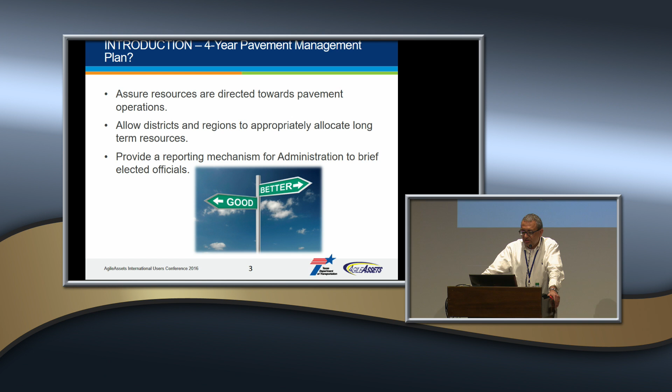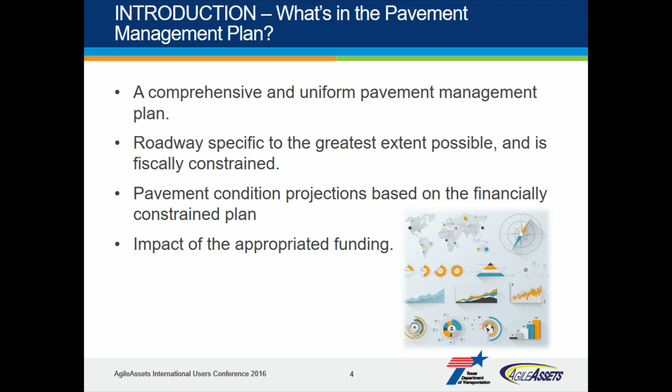And also this plan is beneficial. It gives us a good mechanism to report to our commissioners and our legislators: here is what we're doing for the next 4 years, and here are the results that we expect. The plan that's used by TxDOT for this legislative requirement is a comprehensive plan. It includes construction projects and maintenance projects, basically any project that will impact pavement performance or our scores on pavements.

The plan is roadway specific and is fiscally constrained. Most of the districts' plans are roadway specific for years 1 and 2. For years 3 and 4, the majority of them will assign a budget for a county or a maintenance section. They will say X amount of dollars for preventive maintenance or X amount of dollars for light rehab. And also, the plan gives us a way to show the impact of the available funds and the projects that we're selecting. This is what we expect.

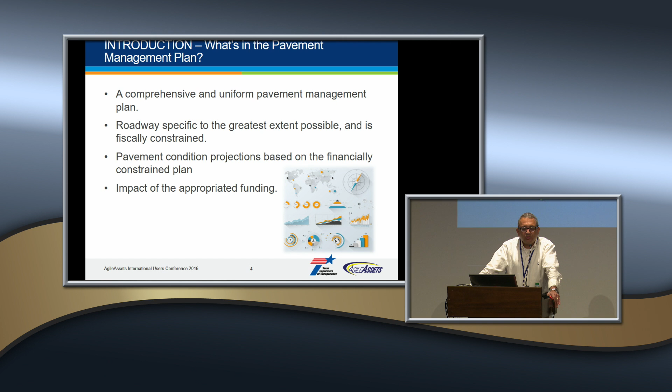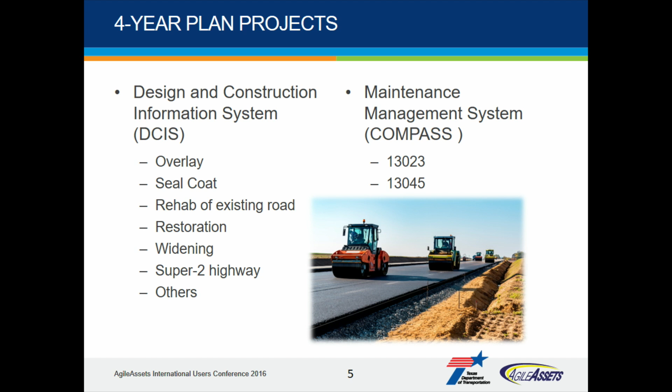So when we work on these 4-year plans, we extract information from 2 different sources. We extract information from our design and construction information system, we call it DCIS, and we look for overlay projects, seal coat, rehab, restoration, widening, Super 2 highways, and others. When we started working on these plans, we were only pulling construction projects. But we realized that we were missing a lot of projects, because some safety projects can impact pavement performance, and with some mobility projects you're getting a brand new pavement.

So we stopped pulling projects by category or group of funding. We are pulling projects by work type, and we don't account the funds from mobility or safety, because this would bias the numbers. It would show as if we're spending huge amounts of money on maintenance and rehabilitation, but we're trying to capture the benefits that we're getting from the safety and mobility projects. And we're also trying to capture the maintenance projects and the in-house work.

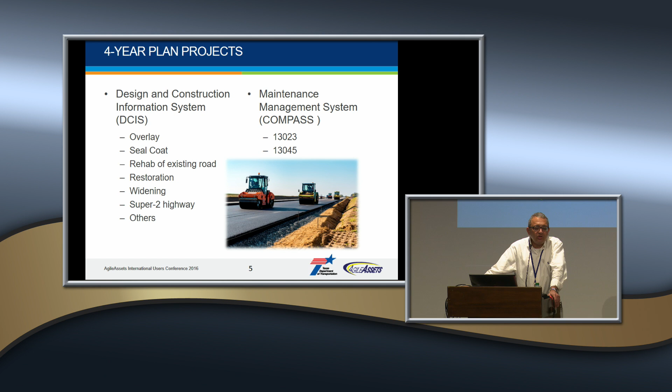We have our maintenance sections. They do a lot of in-house work, a lot of in-house chip seals, or as we call them here in Texas, seal coats. Some of them also do in-house overlays and in-house full depth reclamations with a seal coat, a chip seal. And we also have projects that are contracted out. So the 13023 and the 13045 are the codes for the in-house maintenance projects and the maintenance projects that are contracted out. We pull these projects from our maintenance management system.

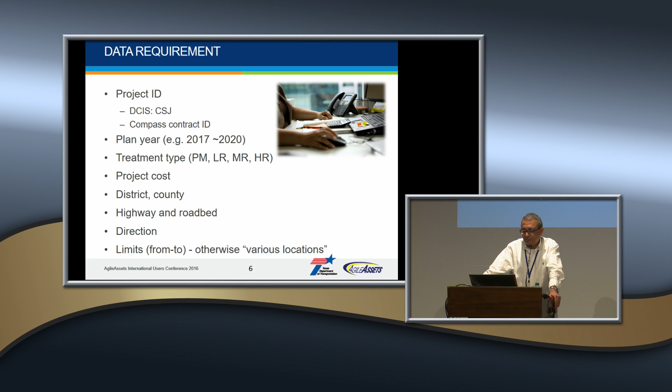We pull all of this information. We pull the project ID, the year, and the cost, the district, the county, the highway, the roadbed directions, and the limits for the roadway-specific project, because this information is very important for the analysis. It's needed because for these limits, that's how you're going to reset the scores for these limits. And this information is needed for the analysis.

Before I start talking about the slide, TxDOT had a legacy mainframe system that was developed more than 20 years ago. And we didn't have the capability to do the analysis for the 4-year plans in-house. We had to, in a way, contract this work out to one of our universities, to one of the professors who works in the area of pavement management, to do this kind of analysis for us.

But now, we wanted a new system, a modern system that's web-based, that's user-friendly, that people are going to have web access to, that will give us a lot of capabilities. And one of the main capabilities that we wanted is to be able to do this kind of analysis and to be able to answer the kinds of questions that administrations of transportation agencies are now asking. How much money do you need to achieve a certain goal? How much can we achieve with the available funds?

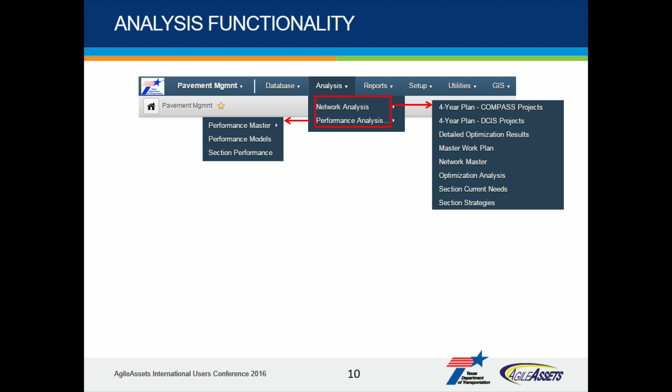So as you work with all the other aspects of the system, and you can switch back and forth between them, you can also take a look at your analysis menus right there. You can be as detailed as you want, where you can go in and create your different analyses, doing the optimization and coming up with your 4-year plan, or you can be as brief as you can in your display of the data.

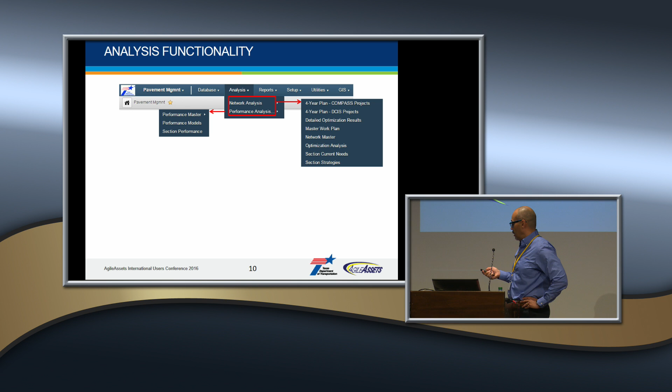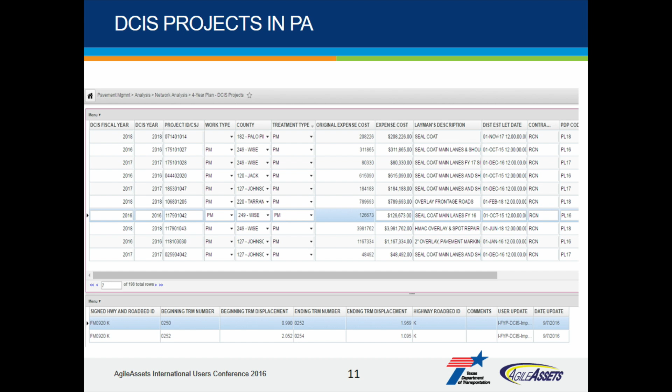So this is what a 4-year plan would look like based on, for example, the DCIS. Magdy mentioned the 2 sources of the data. And then you can take a look at your projects. These are the suggested projects that are the output of the analysis. You can take a look at this in a very brief and concise form. And you can also take a look at the other source, which is the Compass.

Now, to get that result, there are a lot more sophisticated analyses that have to be done, and that's what Feng is going to talk about in a second. But what I'm trying to present here in this very short interaction of mine is that basically all this analysis that Feng is going to talk about is integrated completely within the AgileAssets pavement analysis system. And so, as Magdy mentioned, they had to farm this out before to other researchers. Now they don't have to. The analysis can be completely done within the system.

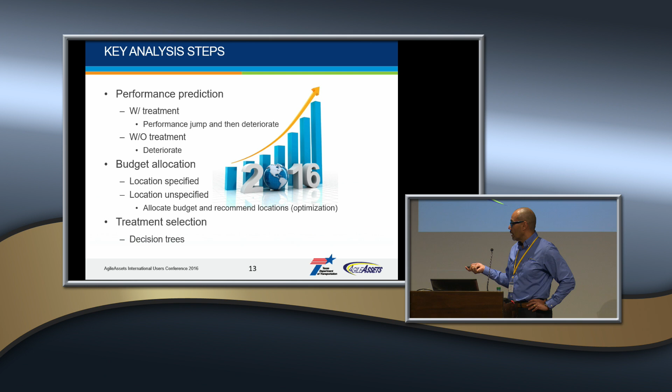So in the analysis, you can perform all the activities that you do for analyzing your data, coming up with your projected goals and projected projects, and all the items that you need.

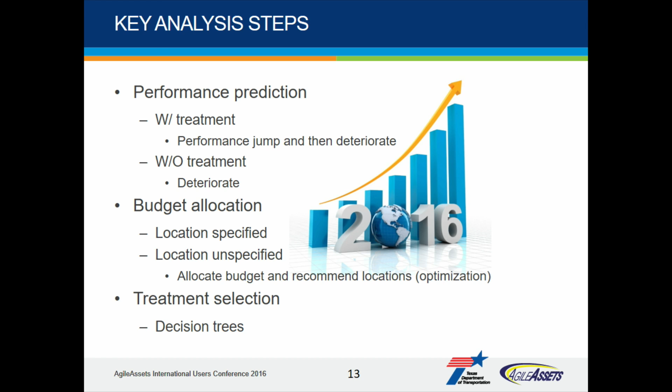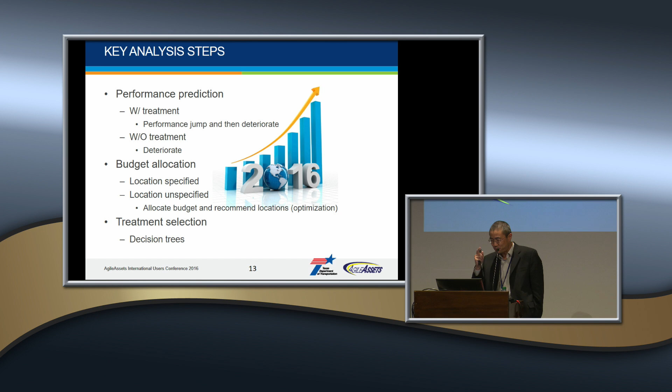And from this slide forward, I'll let Dr. Feng Hong here talk about it. He's the man that's responsible for creating all these analyses. I would say Eric is the man who is behind this work a lot. Yeah, my name is Feng Hong. Good afternoon. Actually, I'm working with Magdy at TxDOT.

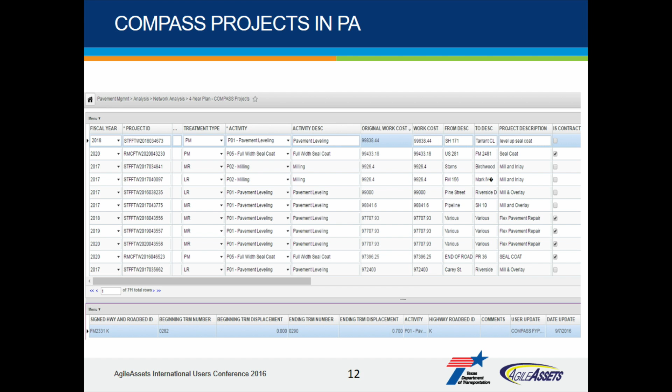I just want to add a few words on these projects. Actually, these lists of projects are from the districts. District people input the data into DCIS and Compass. And during the planning season, these projects are dynamic, so they're always making changes. So in order to keep updated with these projects, we have an interface built behind this. That interface can automatically pull the data from DCIS and Compass.

We can also set up a schedule to pull the data. Right now, the schedule is weekly. That means if a district, let's say here in Austin, the district pavement engineer, changes, adds or deletes projects today, next Monday it will be automatically reflected in the PA. So in our analysis, it's almost up to date.

Now we have all these initially planned projects in place. The next step is to run the 4-year plan analysis. Basically, this 4-year plan analysis addresses 2 tasks. The first one is using the optimization algorithm to allocate the budget for what we call the unspecified locations. For example, we have a statewide, district-wide category program. It has a budget for each district, but there's no location identified. So the PA will recommend projects for those budgets.

The second task of the 4-year plan analysis is to predict the network level performance. Once we have those treatment sections, we will see what the predicted network level performance is. Basically, we can have 2 types of predictions. The first one is if a section receives treatment, we are going to apply a performance jump to that section, and then it will deteriorate from the jumped performance. If a section does not receive any treatment, that section will keep deteriorating to the next year. This is for the performance prediction.

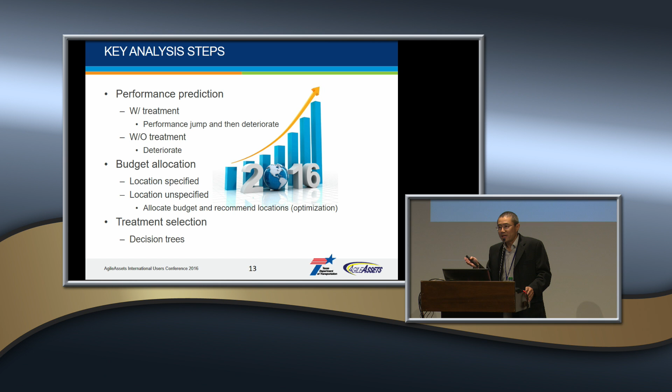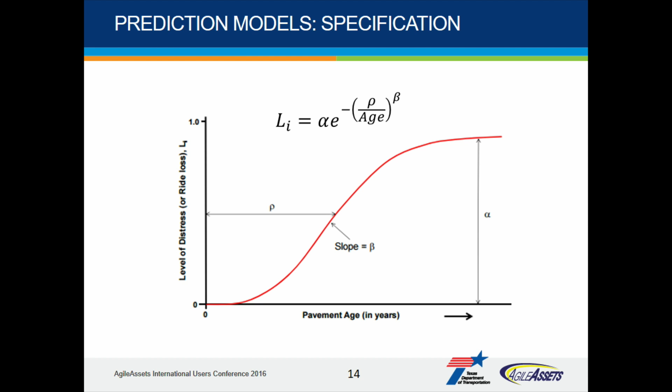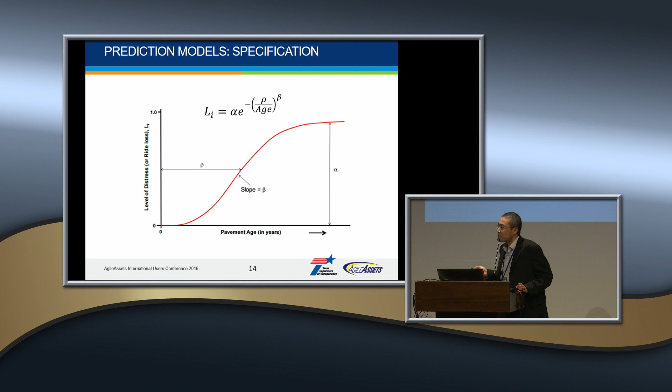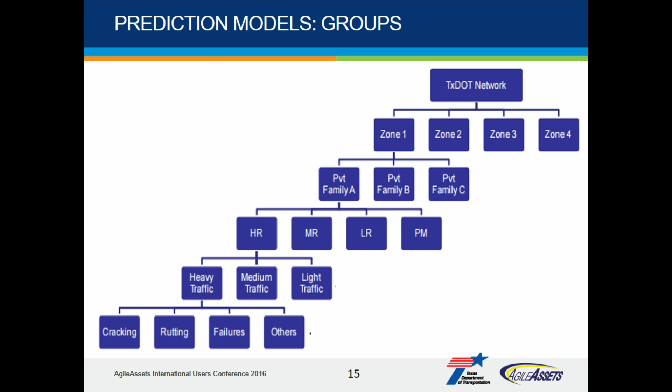So everything is bigger here in Texas. So we don't use just one set of models for the entire state. That means, for cracking, we cannot use the same parameters down in the valley, here in Austin, Central Texas, or up there in Dallas. We need to use different parameter sets to address these variations. In order to do that, we categorize these models into what we call model groups. This group will include zones, pavement family, treatment type, traffic, and of course each distress type and ride quality.

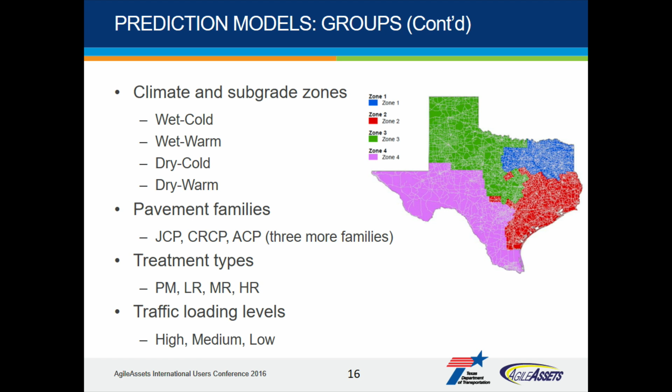For more detail, in one of our research projects, we divide Texas into 4 regions: wet cold, wet warm, dry cold, and dry warm, which is in West Texas. Pavement families are divided into jointed concrete, continuously reinforced concrete, and asphalt pavement. Asphalt pavement we further divide into 3 more subfamilies according to the general pavement thickness. For treatment types, PM, light rehab, medium, and heavy rehab all have different models.

And for traffic loading levels, we all know pavement will perform differently under different traffic loading. We have heavy, medium, and low traffic. This traffic is categorized based on the projected 20-year cumulative ESALs. So by considering all of these factors and all the distress indices, we have a total of 2,160 sets of model parameters incorporated in PA.

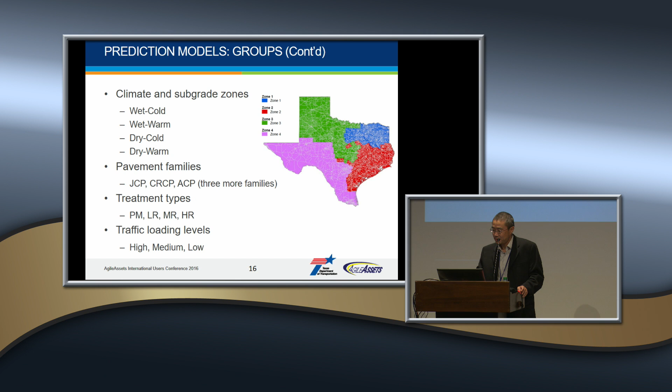When it comes to the decision trees, we use decision trees to select treatment types based on relevant decision variables. That means we input the distress score, ride score, performance scores, traffic, and all other indices into the decision trees. The tree will recommend different treatment types. Otherwise, there's no need to do anything for that section.

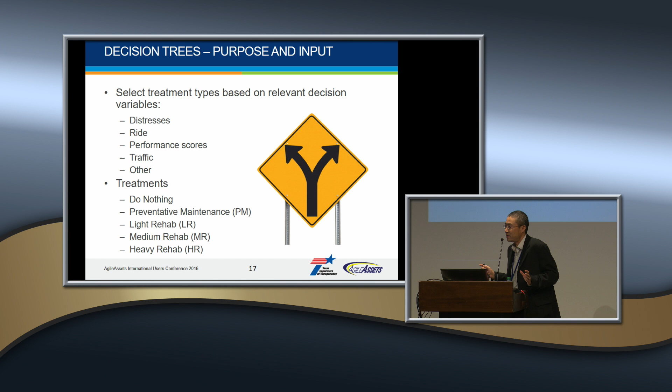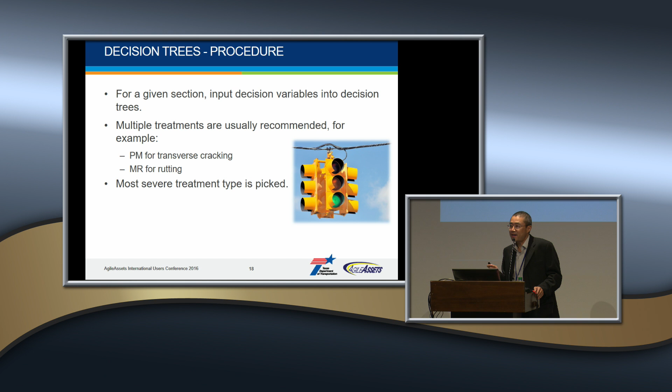So how do decision trees work? For a given section, we have all these input variables. We feed the input variables into the decision tree, and multiple treatments are usually recommended. For example, based on the transverse cracking decision tree, it will recommend PM, and based on rutting, the decision tree may recommend medium rehab. The most severe treatment type is finally picked as the output of the decision tree.

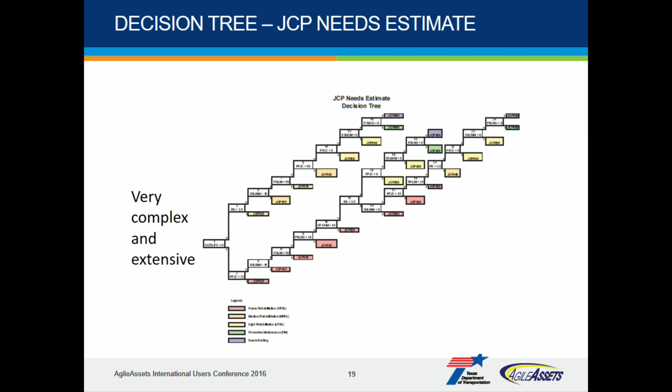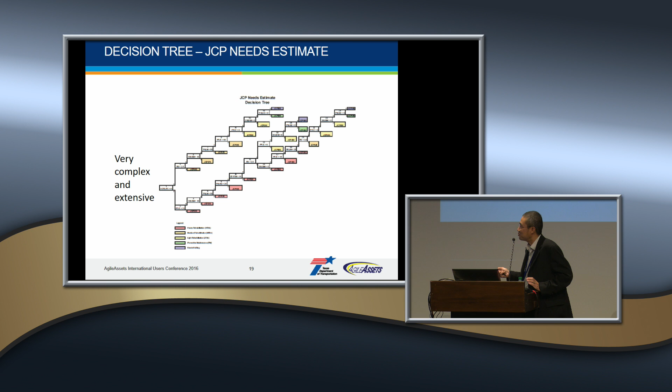Since there are many variables involved in the decision process, the decision tree is very complex and extensive. Here is an example of a jointed concrete pavement decision tree. This is the root, then we have different nodes to make the decision. So it's kind of a big picture of this decision tree. I think it's too small to read; I will give more detailed examples later on.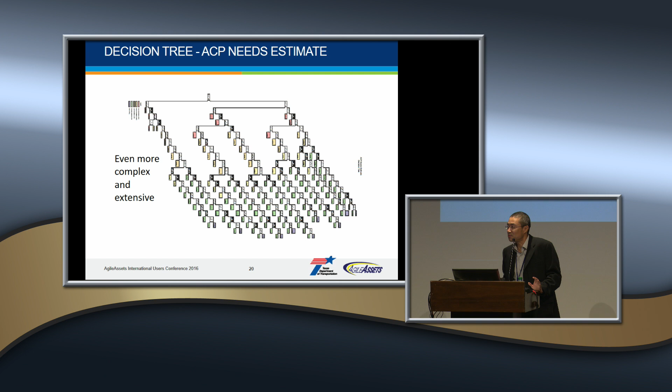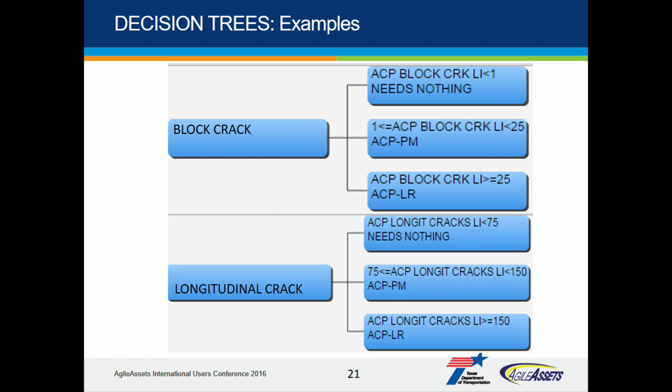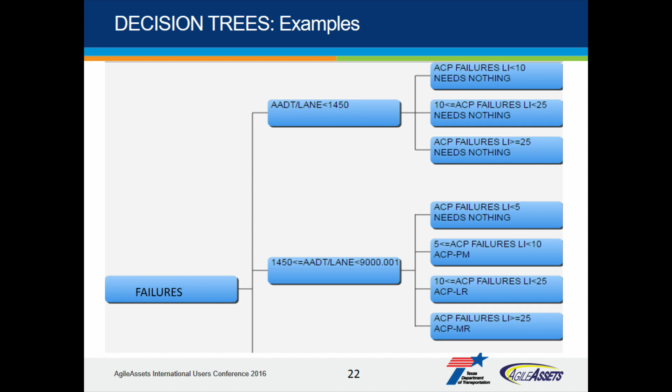Here are some examples of the decision trees incorporated in PA. For example, we have block cracking. Based on block cracking, the tree will recommend a treatment, let's say PM. Then for longitudinal cracking, it will recommend, let's say, light rehab. And for failures and traffic, let's say it will recommend medium rehab. Similarly, we have a bunch of other trees based on all those distress scores, which will recommend different treatments.

So if the most severe treatment recommendation is heavy rehab, then heavy rehab will be recommended for that section. However, whether we will use heavy rehab for that section is not finally decided, because it still depends on funding availability. If there's no funding for that section, even if there is a need, we cannot assign treatment for that section.

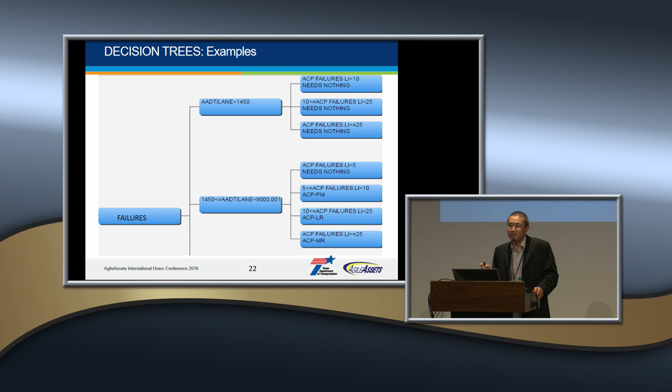So in a word, we still need to use the network level optimization tool to run this analysis to determine what treatment will finally be picked for that section. We have all these analytical steps and all this data now incorporated in PA. I call it a one-stop shop for the whole system. Next, I would like to present a demo on how we can use PA to run the 4-year plan analysis.

Is it still open? Okay. See. Okay. You want to try to enable it, or do you want to just use this? Okay, I can use it. Let's show it. Okay.

Okay, thank you, Ahmed. We have what we call PingOne access, which provides the link for all users in TxDOT. Once we log in there, by the way, the login username and credentials are the same as our daily Novell login, so users do not have to create a new password. Once we log in, we have an interface like this, which Ahmed already mentioned. We have development, prod, QA, and training environments. Now I will go through the prod system.

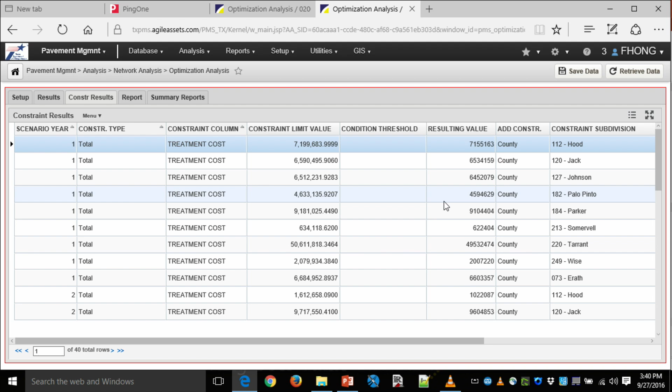And also, we have the results. This is a list of detailed projects in the plan, which includes analysis year, what kind of treatment it will receive, what is the cost, what is the location, the highway name, and the limits, beginning or end reference mark. If we go to the right, we can see we have project status.

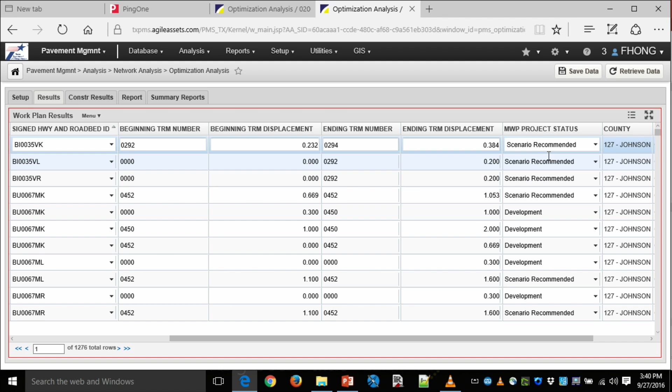We have two types. One is development. That means this project is determined by the district. They already determined to do it for sure. And also we have scenario recommended. That means for those locations, the district has not picked any locations. They just have budget, they don't have locations. So the program would recommend projects for those locations.

So if the users, let's say the district pavement engineer, are not satisfied with the results, they can make any changes on this list of projects, add or delete or change. Then they can reload this list of projects and rerun the optimization until they feel, okay, this is what I want.

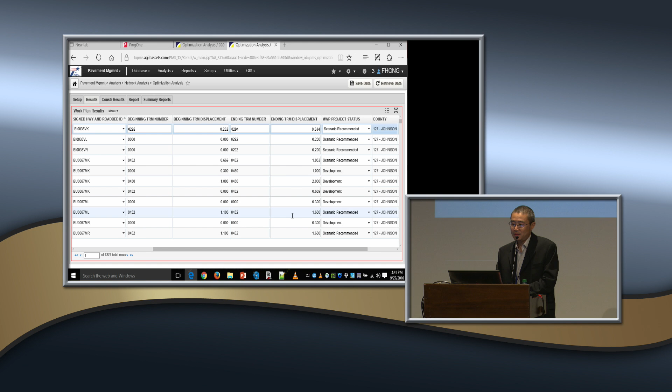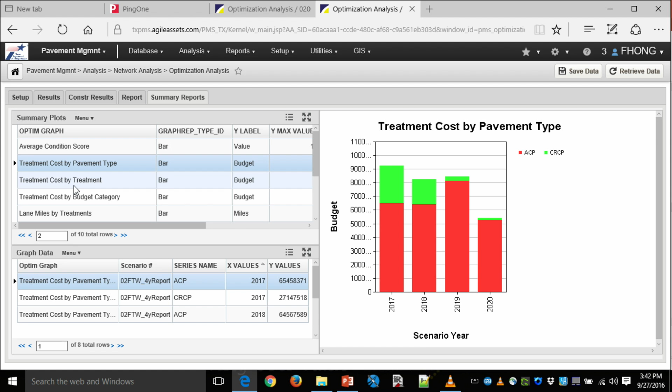If we click summary reports, it will show some statistics of the results. For example, we have average condition scores in the forthcoming 4 years. We also have treatment cost by pavement type, and lane miles by treatment type. Oops. Oh yeah.

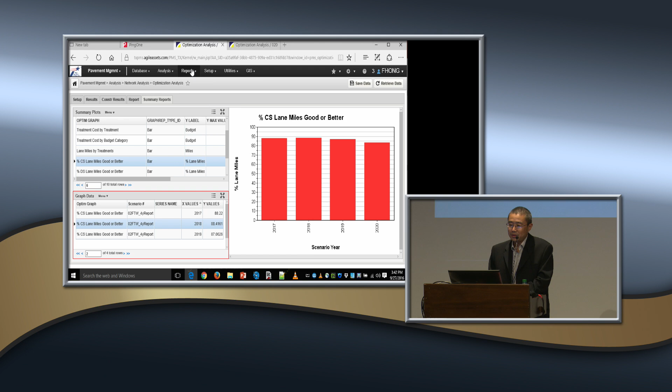Again, this is like a first view of the results. If we want to see more detailed or more comprehensive results, we can go to reports. There's a reports module. Within this module, there's a dedicated folder which provides pre-established format results. The user just needs to right-click it and pick the scenario. Then the PA will generate reports. So it's here. We have a list of reports over here.

I'm not going to delve into the details. I will continue with the PowerPoint and show some of the key reports we include in our annually published 4-year plan official report. I'll just skip.

Okay. Yeah, thank you. Yeah, just move down. Yeah, move down. So these are just what I presented in the demo. All right.

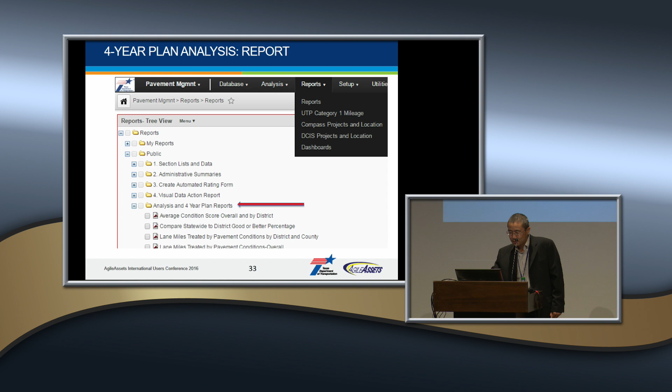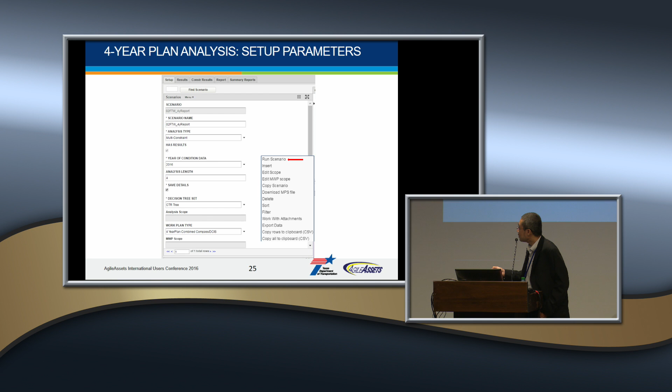Okay, this is one of the reports the PA generated. Basically, this chart shows, oops. This chart shows the statewide percentage of good or better roads over time. The solid red line shows the percentage of good or better roads in Texas from 2004 to 2016.

The red dotted line shows the percentage of good or better roads in the forthcoming 4 years under the 4-year plan budget. And this blue line shows the worst situation if we don't have any budget. See, there's a gap between these two. By the way, the Texas Transportation Commission has set up a goal. The goal is to have 90% of our network reaching good or better roads.

Here we can see, next year, according to the plan, we are getting really close to this goal. But in the coming years, it's going down. In the next one, we will see it's because we have less budget and fewer treated lane miles. That's the reason why the percentage of good or better will go down over time.

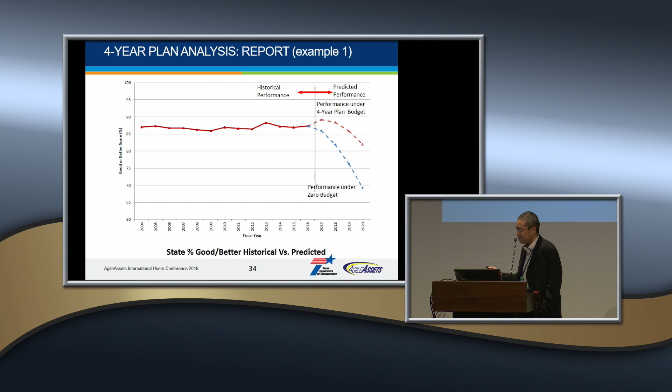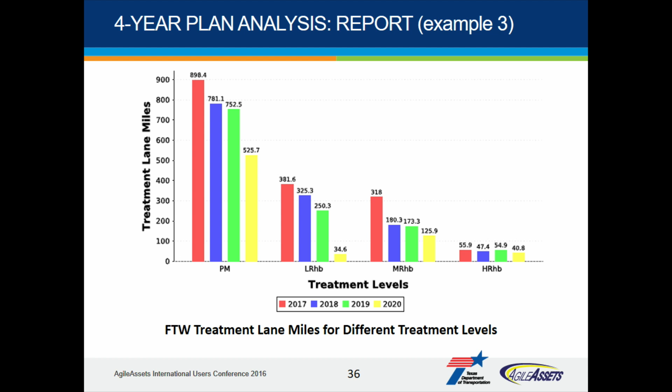This chart shows the treated lane miles for Fort Worth district for the forthcoming 4 years for different treatment types: PM, light rehab, medium rehab, and heavy rehab. Here we can see the majority of the treated lane miles are for preventive maintenance. Also, from the first year to the second, third, and fourth year, the treated lane miles are going down. This explains why the percentage of good or better roads will go down over the years, because we have fewer planned treatment lane miles over time.

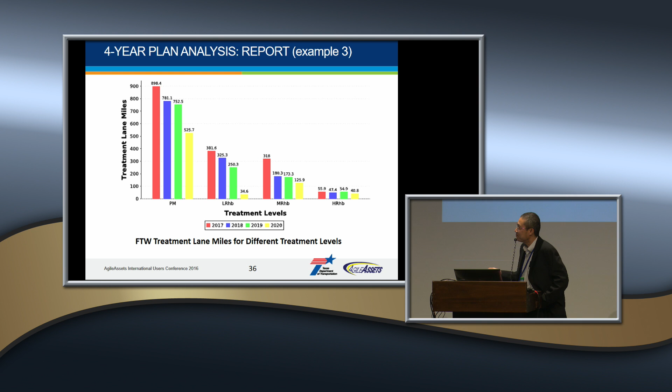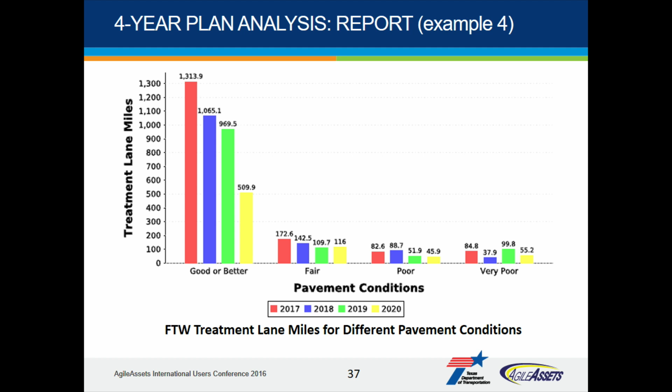Similarly, this chart shows the treated lane miles for different pavement conditions: good or better, fair, poor, and very poor. Here we can see the majority of the pavements receiving treatment are in good or better condition right now. This reflects a philosophy in pavement preservation: keep the good roads good.

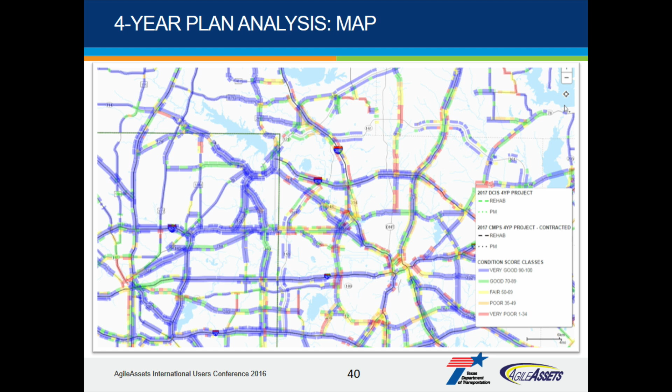Last but not least, we were told almost every user in the district would like to see the projects instead of just having a list of projects in a table. So it is very important to display all these planned projects on the map. This is a snapshot of the 4-year plan projects on the Texas road network. We can have different options. We can display only DCIS projects, only Compass projects, or both types of projects on this map.

In addition to the projects, we can impose different layers on the map, such as the current pavement condition or the traffic level. So we are quite capable of running analysis and displaying the results on this map.

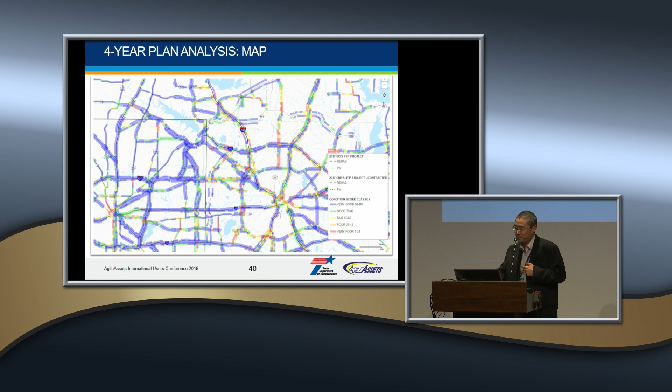So with this, I would summarize this presentation. With the successful launch of the new pavement management system, the Pavement Analyst, in TxDOT, we now have much more capacity to run analyses such as the 4-year pavement management plan analysis. This capacity includes, but is not limited to, recommending projects through optimization and performance prediction for each project as well as for the network level, and generating tabular reports, chart reports, and GIS reports.

The development of this project would not be possible without close collaboration between the team from AgileAssets and the TxDOT team. Here I would also give credit to my colleagues, Jenny and Joe, for their excellent work behind this.